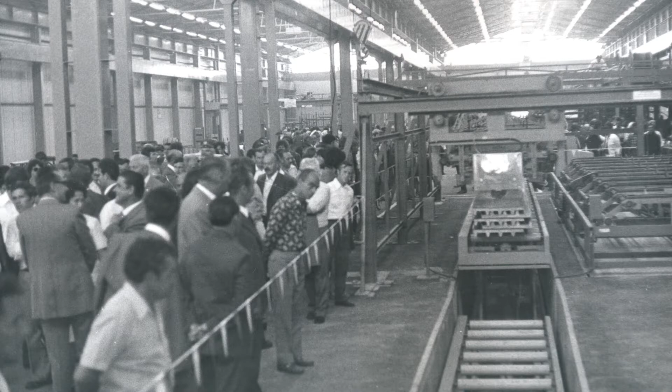Trimo's story began in Paulin's stable in 1961 under the name of the Kovinsko Podjetje Trebnje. After 10 years of successful operation and merging of companies at the local level, the company was renamed to Trimo, Trebanjska industrija montažnih objektov. In cooperation with Professor Janez Koželj, the company got a new logo.

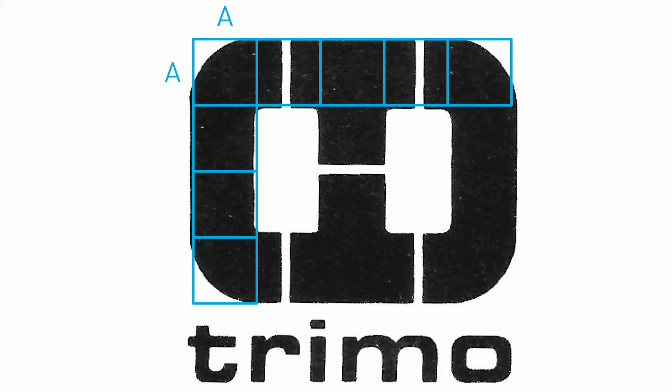The geometry of the logo consists of the components of dimension A and the corner edges at the same radius. With interruptions, the architect created the mirrored letter T, which are the initials of the Trimo's company name. In 1980s, it wasn't unusual to see buses with billboard of Trimo's logo passing by.

The next turning point for Trimo occurred in 1987. That same year, in the US, Black Monday has happened and the stock markets around the world crashed and caused the financial crisis. During this period, a severe fire broke out in Serbia, prohibiting the construction with polyurethane panels.

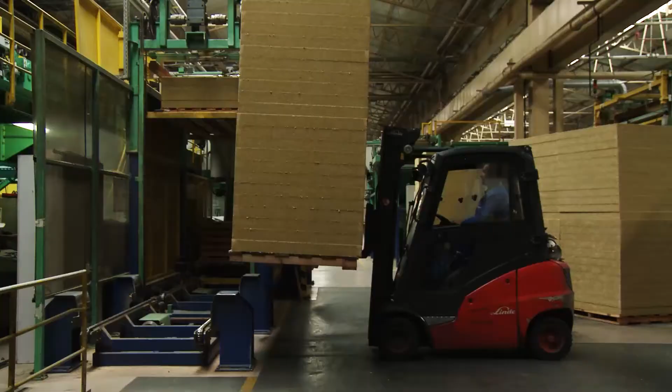Trimo focused all its knowledge and creativity in replacing the core for its products, as Yugoslavia was a big market for Trimo at the time. In 1987, Trimo launched the panel production with the core of mineral wool, making it the first company in the world to manufacture mineral wool core sandwich panels.

The architectural solutions that I will show you are built from Trimo's product systems. In many cases, the developed solutions were a result of a great collaboration with Slovenian and foreign architects. One such example is certainly the impressive architecture of Arcadia Lighting, made by architectural studio Sadar plus Vuga.

The floating black cube with a large console is wrapped into the so-called TrimoTherm facade envelope. This building envelope is characterized by long-span vertical elements with invisible fixation. The result is clean and timeless lines.

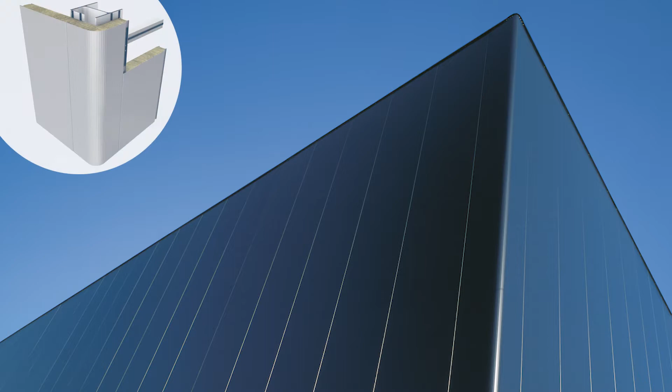The interesting feature of this project was the development of a new corner. The architects wanted the facade to continue around the corner with the same look, so the project development department came up with a unique bending technology that used a flat element to reach the standard of the desired corner detail.

The following architecture comes from the automotive industry. This is the Opel Sales and Service Center in Kranj, whose architect is Milena Todorić-Toplišek. Highly articulated architectural detail with innovative salon layout head up the micro-urban standards along the city roadway. The architect received the Plečnik Medal and Mies van der Rohe Award nomination for sophisticated architecture.

The 2003 multiple building made by architect Jože Petrkoč has a similar gripping story to the previous one, but results in a completely different dynamic and iconic architecture. The entrance to this space is the leading motif of a two-story space with an entrance ramp shaped into the road, which with a glass front facade like a television glows into the frequent roadway.

The facade is designed as a monochromatic membrane or shell which passes into the roof in the same material and with a perforated free composition of openings enables views of different scenes.

At the beginning of the new millennium, Trimo also collaborated extensively with Professor Aleš Prinčić. Following the arrangements of roads and entrances with bus stops, 3 new facilities were created in the Trimo area.

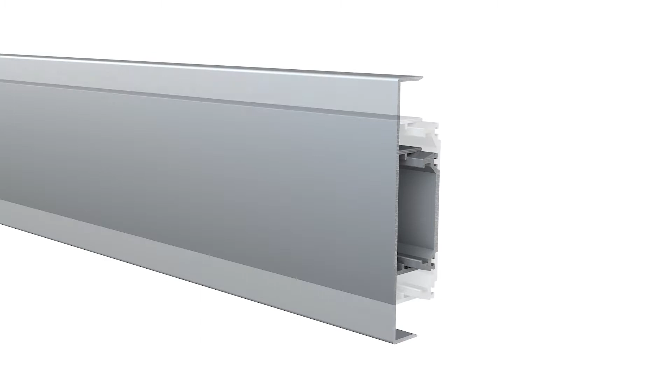Even before the year 2000, Trimo, in collaboration with architect and industrial designer Rok Kuhar, today also known for interior architecture, developed facade decorative elements. With the help of aluminium extrusion technology, he designed a more sophisticated form of timeless decorative elements that we still use today.

A range of decorative aluminium profiles has been developed that extends the architect's creative expression by providing a wide variety of visual and compositional effects. Profiles can be produced in several different colors, either to match the color of the main cladding or differently, to add a color contrast.

A good decade has passed since the innovative development of the unique Artme product. The story of this building is the Milky Way, which is applied to the building near the Astrophysics Observatory at the University of Manchester. Even old civilizations have been communicating through painting on walls.

Till today, nothing has changed. Artme shows how the habits of people have remained the same over the millennia, while the technology of communication is changing all the time. Artme is a unique, high-tech facade surface treatment with highly controlled 3D technology that allows unlimited shapes, patterns, and visual effects to be inscribed on the facade envelope.

Artme brings together individuality, difference, aesthetics, and design. Artme technology is so unique and innovative that it was awarded the prestigious Red Dot Award in 2010 for design, among 4,252 applications from 57 countries.

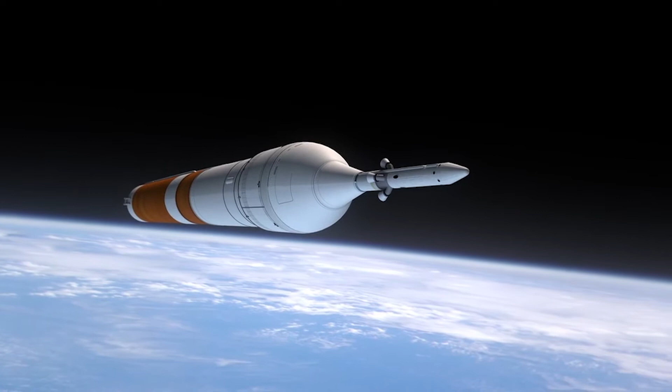In the 1960s, with the advancement of computer and rocket technology, the sandwich structure protected astronauts from radiation, high accelerations and heat. So, without a sandwich, we wouldn't be able to get to the moon.

In this chapter, I will look at Trimo's products that guarantee complete systems of architectural solutions for building envelopes. The Trimo portfolio includes 4 families. Our premium products families are Qbiss One and Qbiss Screen. Next, TrimoTherm family has the longest history with a wide spectrum of use. All those products are closely attached to our family of modular units.

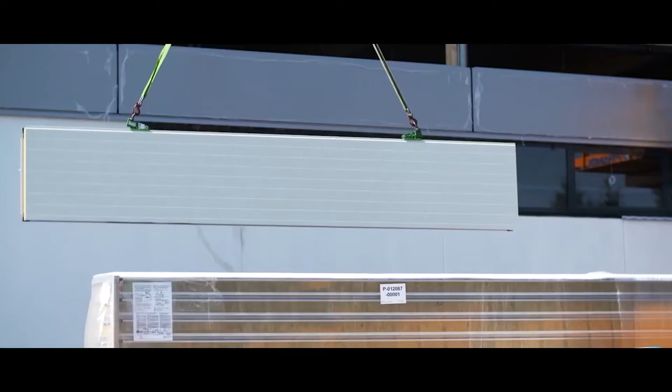They are applied to modular units as the facade envelope. All our elements are prefabricated and produced on an automated robotic production line. The prefabrication process saves time on the assembly on site and requires fewer people.

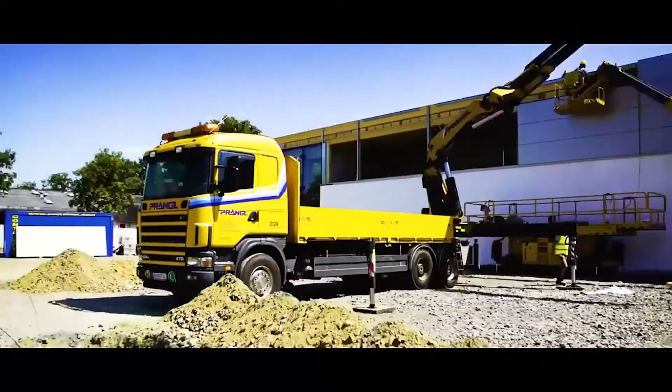First, we will look at Qbiss One and TrimoTherm families due to their similar structure. A modular element consists of 2 galvanized and pre-finished steel sheets bonded to a non-combustible A1 mineral wool core. All layers together make a solid element of several thicknesses. With 4 types of mineral wool, we can meet the highest demands for greater energy efficiency and static stability.

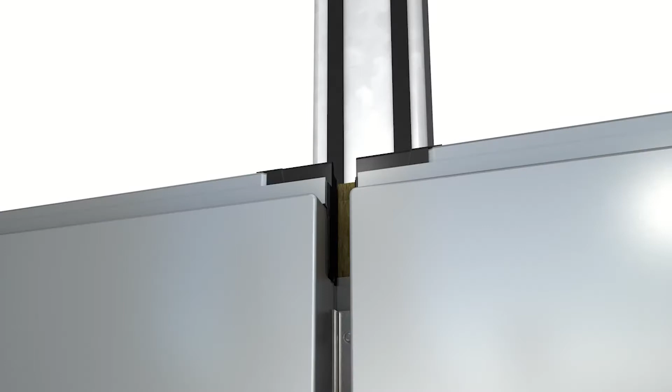Qbiss One and TrimoTherm elements are self-supporting. No additional work is required. The self-supporting facade elements are fixed only at the edges of the substructure or primary structure. It means reducing costs and construction time by up to 30%.

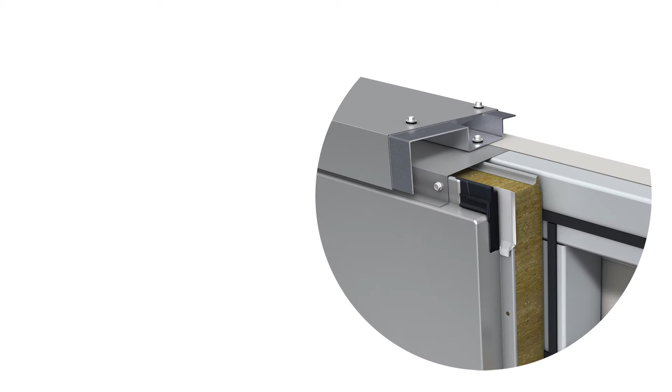Qbiss One and TrimoTherm have many common advantages. Those are complete envelope solutions including all assembly system accessories. Very long fire resistance up to 4 hours. The elements can reach extreme U value as low as 0.16 watts per square meter Kelvin. Those products achieve the best water resistant and air tightness performance in the market.

One of the crucial facts is that the products are up to 99% recyclable and with ecological integrity contribute to a higher sustainable rating of buildings according to BREEAM, LEED and DGNB. And at the end, product quality and flawlessness are covered by all the required certifications.

Now it's time to step into the world of Qbiss One product, which presents a design and technological breakthrough. An architectural metal wall offers a true alternative to a conventional build-up system. Qbiss One delivers the greatest freedom of expression and offers designs of almost unlimitless possibilities. Modular elements with embossed corners, unmatchable flatness, and advanced technical characteristics place Qbiss One among the best envelope systems in the world.

The Qbiss One product system is very flexible in the joint variation and a real playground for architects and a tool to show the world the excellence of design. For expressing the style, Qbiss One's system can be installed in practical unlimited options, even with curved and trapezoidal elements.

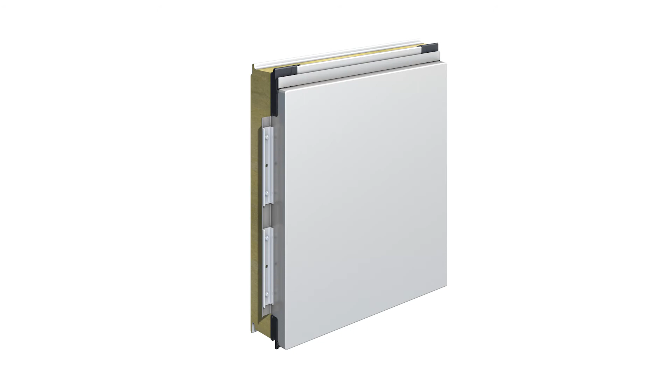An architect can tailor envelopes with elements in modular width from 600 to 1200 mm and raster length from 530 to 6500 mm and pick the appropriate detail accessories from Trimo assortment. The complete architectural system solution makes, at the end, the remarkable building.

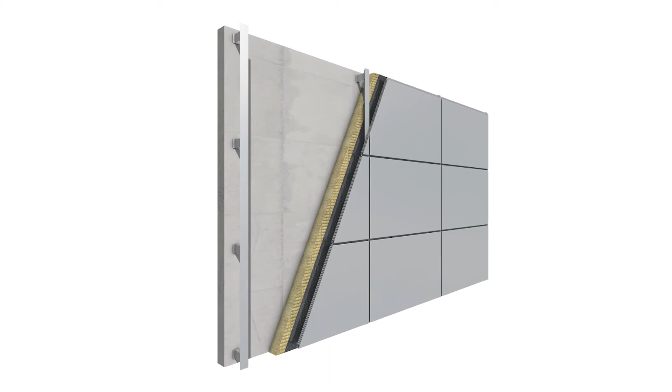For those who build with massive walls and search for a flawless rain screen cladding, Qbiss Screen system is an easy decision. Qbiss Screen is the last layer of a ventilated facade with the same outside appearance as the Qbiss One. Qbiss One goes by its structure hand in hand with the TrimoTherm products.

A range of environmentally friendly products for total envelope solutions covers all applications options from the roof to facades and even ceilings and partitions. When the requirements are very demanding and rationality is in the first place, the TrimoTherm products are the smart choice. Let's meet them better.

The first child of Trimo's mineral wool panels was TrimoTherm FTV, born in 1987 when the first production line in the world with mineral wool core started. This self-supporting, prefabricated panel works best when it's fixed just in both edges. In this way, those panels can reach up to 10 meters span. That means less structure and more saved money.

TrimoTherm FTV panels can be done in modular width from 600 to 1200 mm and up to 14 meters of length. TrimoTherm FTV can cover many functions in addition to its main role, which is an excellent panel.

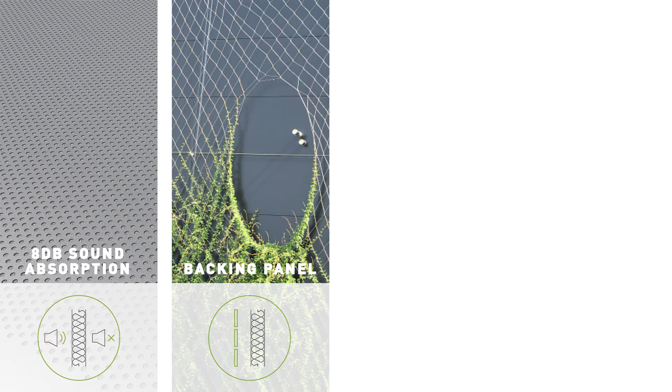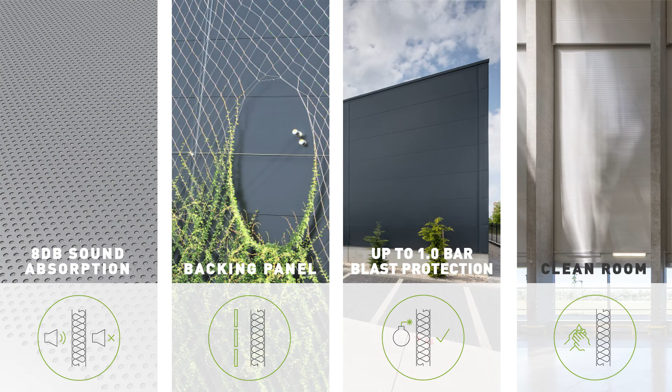It can be an acoustic version with 8 dB sound absorption. It can work as a backing panel for secondary finishes. It can serve as anti-blast protection that protects up to 1 bar blasts. TrimoTherm FTV is also a very welcome solution when parameters for the clean room are required.

The second generation of TrimoTherm FTV is TrimoTherm FTV HL. A special feature of this panel is its invisible intermediate fixation. This means that panels can reach up to 14 meters span if they are attached not only at the edges but also somewhere between the panels.

TrimoTherm FTV panels can be an aesthetic breakthrough when architects use them in a vertical direction. Freedom of profiling combinations creates the appearance of lines and multi-layering. There is also one and only TrimoTherm SNV.

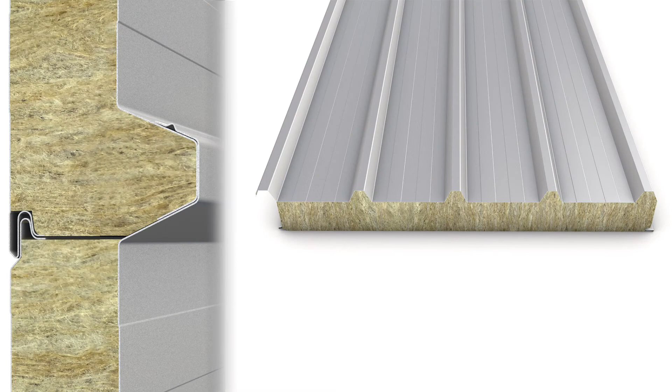Panels are mostly used for roofs, but these panels can be more than that. They fit high fashion when an industrial look is appreciated. I invite you to dare to experience and explore Trimo products by scanning QR codes.

The functionality and beauty of the facade depend on sophistication of the detail selected in the design phase. Every successful project has its own story, but it's common ground that careful planning from idea to last detail is a necessity. I'll start this chapter with a quote: the difference between something good and something great is attention to detail.

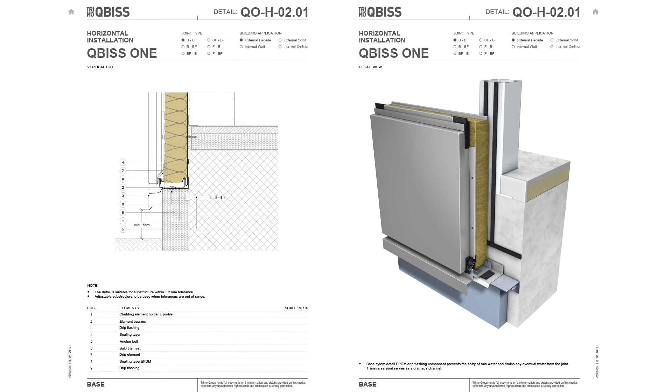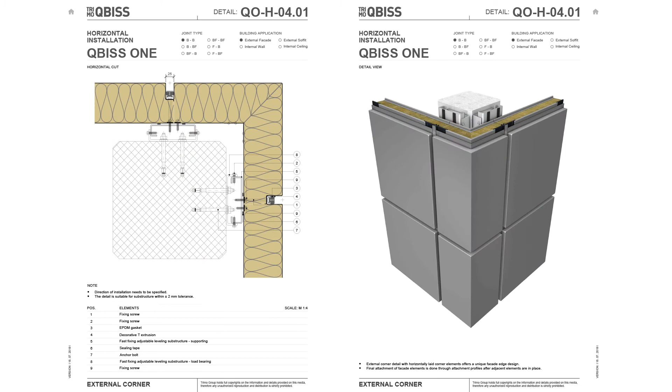More than 100 architectural details were developed in BIM technology. In-house developed details cover total envelope solutions from base to roof, including corner details, openings, and other needed details. Especially so-called architectural details offer an insight into the third dimension through detail visualizations. Design and described advantages of each detail help customers choose the perfect choice for the envelope.

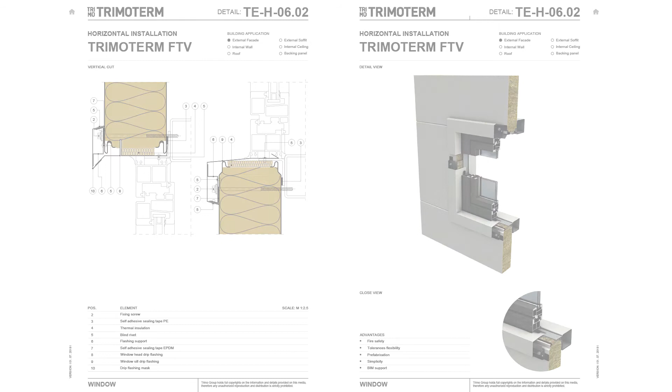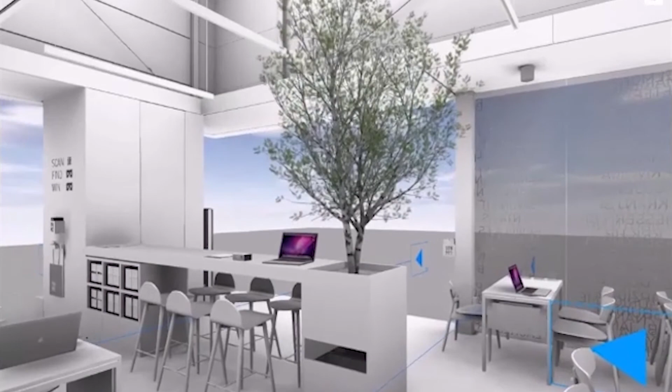The white interior installation for the International Trade Fair BAU in Munich is a representation of building information modeling in practice, using exclusively the Trimo BIM library for Trimo envelope solutions. Trimo recognized the BIM process as an efficient communication tool between architect and manufacturer.

The engagement in the early design has significant importance in design performance and high ability to lower project costs. Our main goal in creating BIM libraries was to make a complex but easily operable tool for architects to use in ArchiCAD or Revit software.

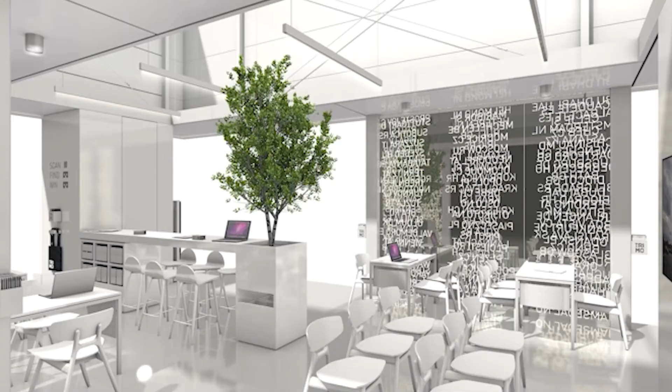The beauty of the rich database of information is that it can operate with real-time data. The 3D tool was programmed with high precision to be set at different levels of detail. In this way, it is possible to create digital documentation for all project stages. All schedules and lists with graphic schemes are automatically generated from 3D models and can be sent to Trimo for cost evaluation.

Interfering with the balance of environment is responsible work. Architects are those who have a vision of how to design and remodel spaces for different purposes, and translate them into practice with other players of the construction industry.

For those of you who embark on the journey of the future architectural masterpiece, get to know the materials you will build with. Get to know the manufacturer. Do not give up on your environmental awareness and use your creativity to find innovative solutions. Trimo will listen to you and step towards you so that we can change the world together.

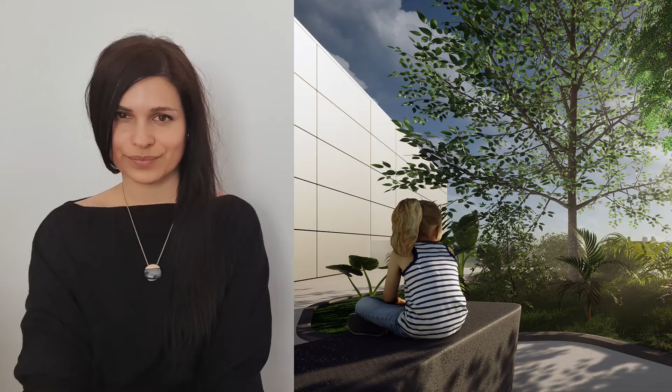Listen to the story of Marko Rožman, a young, newly employed architect who, during his studies, met with Trimo in college. After graduation, he decided that Trimo was the right choice to pursue a career path.

Hi everyone, my name is Marko Rožman and I'm an architect at Trimo company. I will shortly point out advantages of working as part of the Trimo team, and the roots of my story began in January 2019, when Professor Dr. Martina Zbašnik-Senegačnik organized an excursion trip to the Slovenian region named Dolenjska to see a local company, Trimo.

Full of expectations, we wanted to experience the life of Trimo employees, such as team working, machinery operations, and the people who operate them. Once at Trimo, they didn't only present numerous worldwide references and cooperation with the most famous architects, but also a way of working in order to achieve such worldwide recognition.

Trimo has always been an innovation-oriented company that never gets satisfied with average or existing. We always strive for new ideas, principles, problems and solutions in order to clearly assist our working partners, that are usually the architects themselves. A big part of this is the use of the best up-to-date software tools. Equipment means a lot, but at the same time it requires human knowledge to round up a full package.